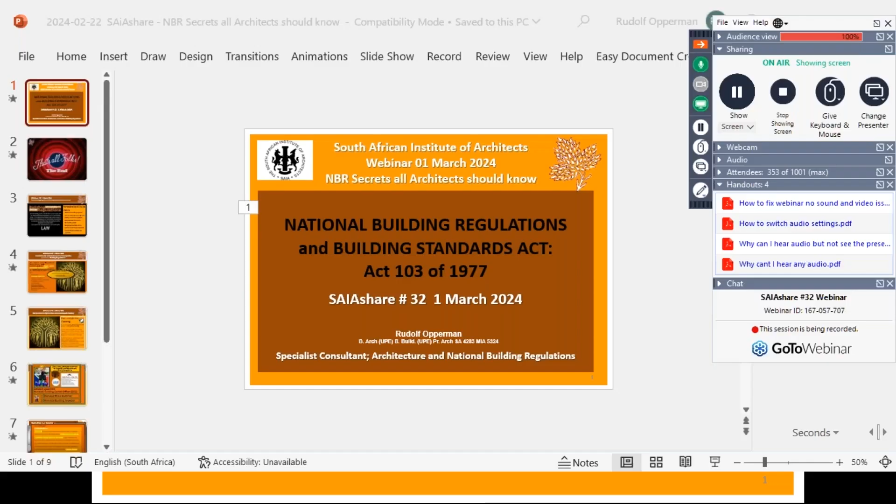Rudolf, over to you. Thank you very much, Eugene, and thank you very much everybody for who's linked into this webinar. I do not take it lightly. I appreciate the fact that I'll be able to discuss some pointers of the National Building Regulations with you.

Ladies and gentlemen, let's get this going. The National Building Regulations, Building Standards Act is a very, very vast, big subject. So I'm not going to try and teach you about the legislation this afternoon. I'm going to just highlight a couple of items. What I hope to do is more keep it short and allow for discussion. You're free and welcome to ask any questions you are faced with, and any information that I can throw you with, so that we can have a discussion and make this thing move.

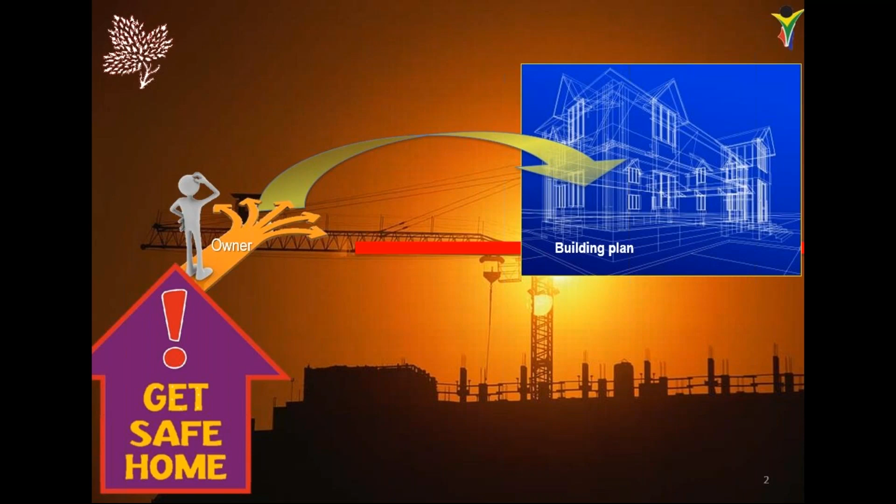We know that there's a whole lot of secrets that are hidden from us in terms of the National Building Regulations, Building Standards Act. But to put it in a nutshell, I think we need to start here with where we have an owner, a client, and this owner and client on the building, and he needs to get a set of blueprints or a technical document that describes what he wants to build, but also at the same time shows him what his dreams are supposed to be. And the only way we can get to the blueprint is by employing building environmental practitioners, and these chaps are taught at tertiary level to put together a set of technical information.

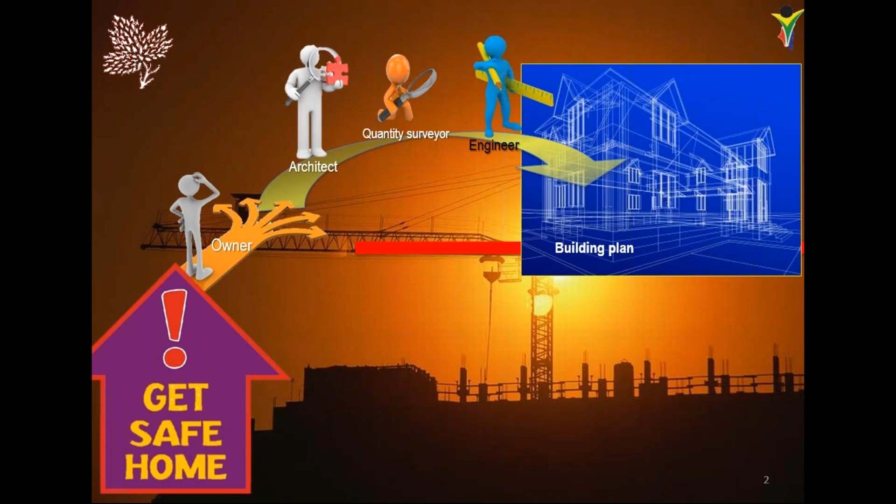This technical information has got a remarkable similarity to what is described in the National Building Regulation as minimum information that must be displayed on a drawing. So if we take that drawing and use the technical information that has been provided for by the professional team, that drawing can be scrutinized to determine as far as yes or no.

Usually the same drawing is also provided to the developer, the main contractor, the bondholder, all of the other side of the building environment, but all other regulators, such in this case the National Home Builders Registration Council. So if we take this building plan and we submit it to the local authority uses the National Building Regulation Building Standards Act, which says all buildings need to be treated uniformly. It has to be in the field of buildings. It must also fall within the jurisdiction of local authorities, and how we prescribe the solutions by using South African national standards provided by the SABS.

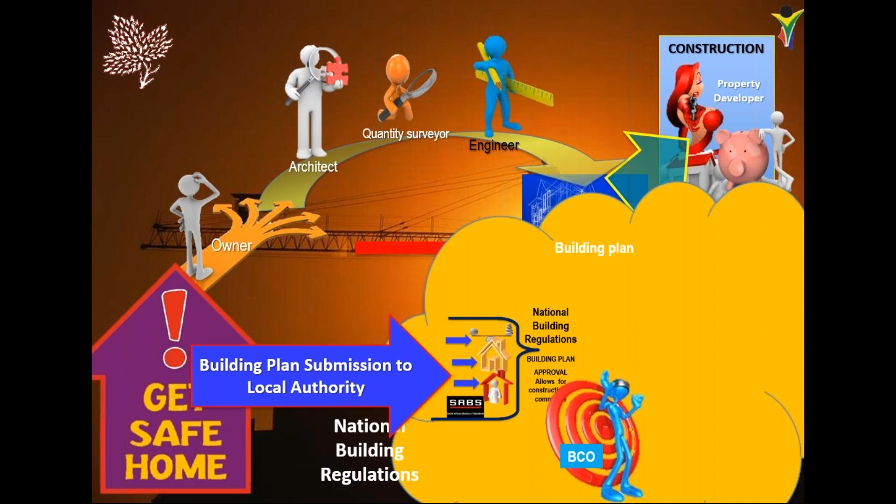Each and every local authority is appointed or is forced to appoint a building control officer. These building control officers come from our profession, and the building control officer then scrutinizes the building plan and then at the end of the day determine if it complies to the legislation or not. If it complies to the legislation, we'll grant an approval. That'll open up the gate for the construction to commence, where all of the specialist trades get involved, and they, at the end of the day, complete the building.

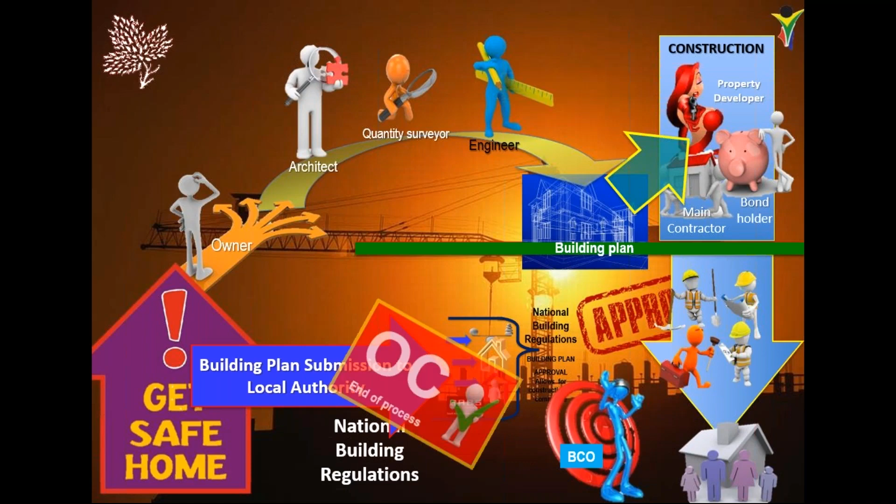Once the building has been completed, the building control officer will issue an occupancy certificate. And that's the end of this legislation. We do not look after maintenance, and we are not involved with the building after it has been completed.

So what is this legislation? This legislation is the National Building Regulation Building Standards Act. It was created in 1977, so it's old order legislation. It's a good vintage, and I can guarantee you that all of the loopholes that were written into it in 1977 have at this stage been effectively closed.

It also requires that all new building work in South Africa must comply with the regulation, as it is the building code. It is a performance-based code, which means it states how a building and its components must perform, as opposed to describing how the building must be designed and constructed. The intention of the 1977 Act was clearly to create an overarching legal and technical framework for the building industry.

We then have the Constitution of 1996. Please take note, it is not linked to the 1977 Act. For instance, items such as municipality - the definition of municipality in the 1977 differs considerably from the definition of municipality in the 1996 Constitution, and therefore arises one of the main problems that we have with the legislation.

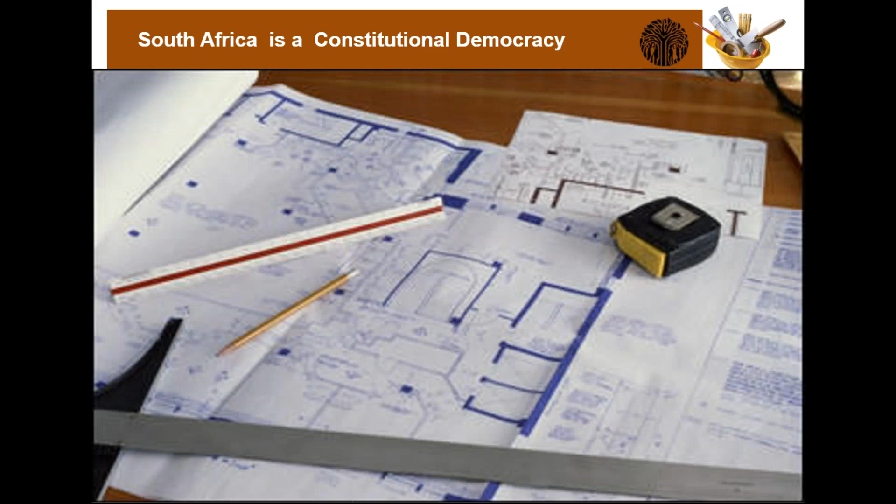So how does our legislative framework sit together? First, we have an act. And unfortunately, this act binds the work that we do. Section 3 of the act provides the duties of draftsmen of plans, specification, documents and diagrams.

Any person who prepares any plan submitted in terms of this act shall affix his name and address, and in the case of the architect, also his profession and registration number to such plan. So we are directly linked into the National Building Regulation Building Standards Act at the highest level.

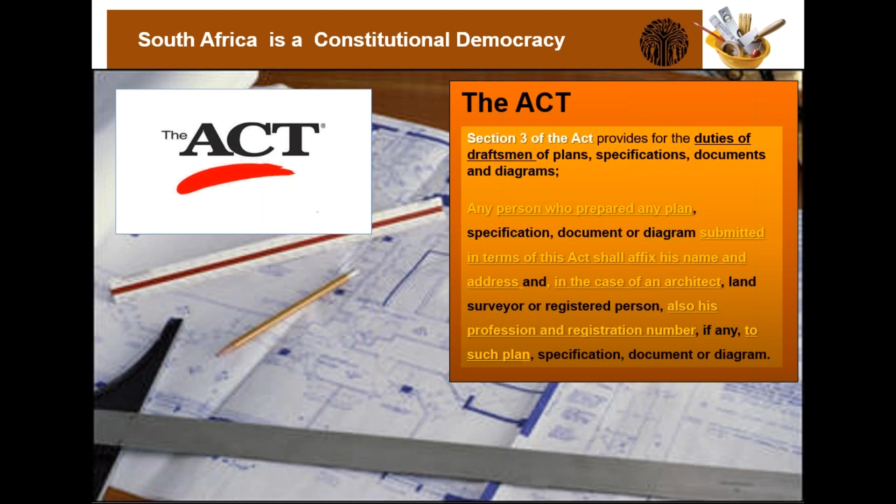Remember, acts of Parliament are created by Parliament, and you cannot change any of the requirements except if Parliament themselves decide to do so. With the Act is a set of regulations. The regulations are the how to satisfy the Act's requirements.

And within that section in the regulations, part A, administration, it says if you design, plan, supervise any building or structure, or the performance of any function in connection therewith, the person undertaking such work is required to be registered in terms of the Architectural Professions Act 2000 or other acts. But that's where we are then physically not only bound by the Act, but we're also bound by the set of regulations. Please take note, this Act was written in 1977, so it's not new legislation, it's old legislation.

Then we've got a set of deemed to satisfy documents. And because we don't want to reinvent the wheel every time we submit building plans, we provide you with a set of easy followable building solutions. These solutions are provided by nominated captains of industry, and they research and debate the requirements and bring solutions that will satisfy the building regulations. And that's what we call the deemed to satisfy the regulation rules.

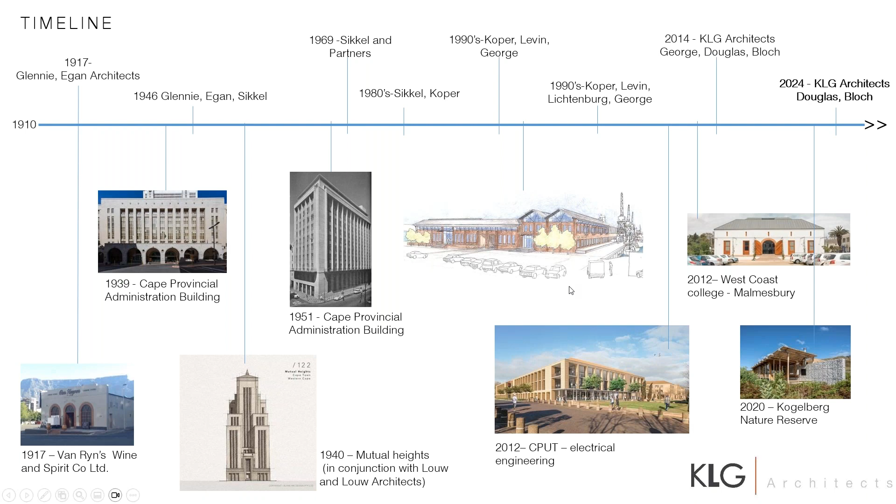This is a summary of what we're about and how we approach architecture in the firm. The first principle is context—this physical, climatic and social context informing the initial positioning. The diagram is very important to us, looking at the bigger picture and synthesizing it into its simplest form that can be expressed in a very simple diagram.

Using appropriate technologies in appropriate ways, going back to first principles, getting the basics right—proportion, flow, layout, spatial dynamics. We refer quite a bit to A Pattern Language by Christopher Alexander.

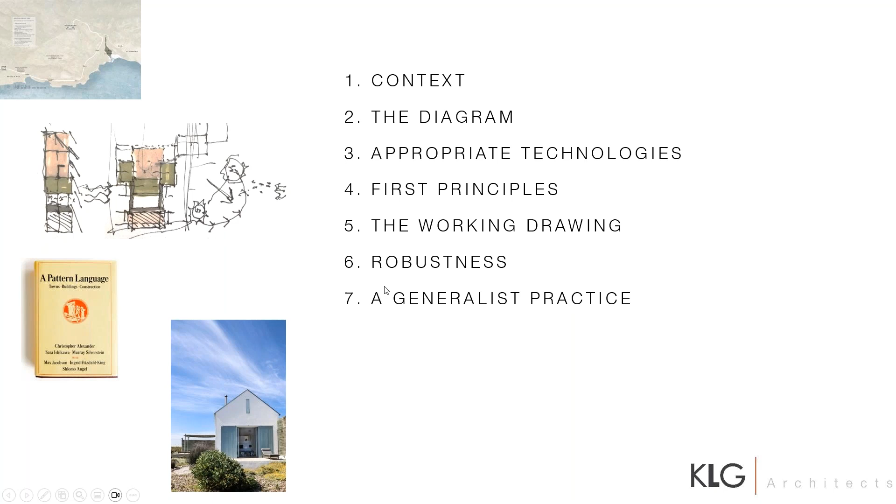The working drawing is also integral to our practice. It's the guardian of the conceptual principles generated, synthesizing this deep into the detailing. We believe in making buildings that are able to take some change, thinking long into the future—what will these buildings be in 40 years' time? And we are a generalist practice, specifically not specializing in any one mode of architecture.

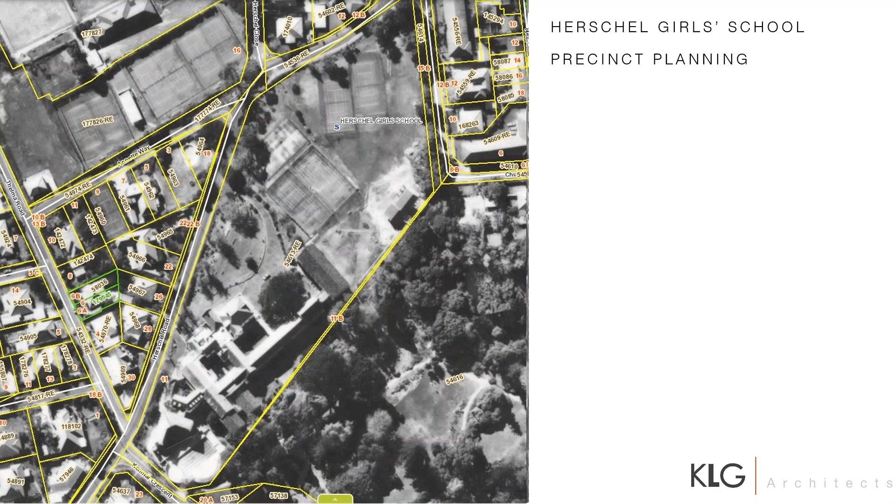I'm going to go through some of the projects that we have been involved with at Herschel Girls School. Herschel is a school in Claremont, in the southern suburbs of Cape Town. We have been involved at the school for 18 years now, since 2006.

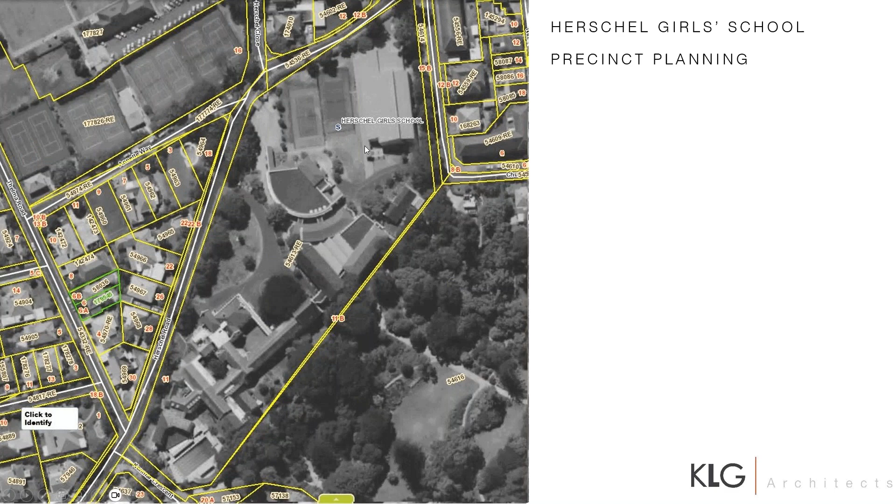The school began over 100 years ago and was built up organically over time, and in many ways with quite disparate buildings with little overall campus planning. One of the benefits of having a long history with the client is that we can work together towards a shared vision of the future, and not in a haphazard or bitty manner.

Integral to all of our projects at Herschel has been generating and updating this overall campus master plan. Our main focus with regards to the precinct planning at Herschel is to identify the opportunities of growth without, wherever possible, taking up valuable open space on the relatively small campus.

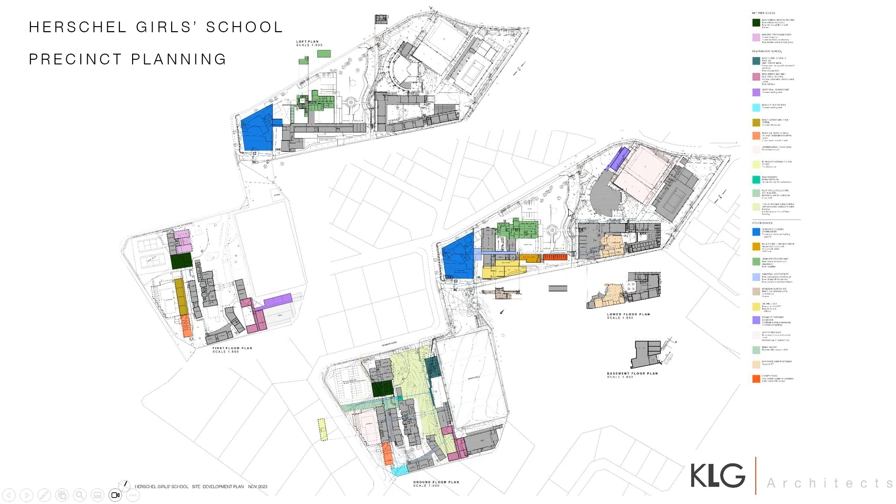So densification of the existing buildings is a primary driver. Legibility and wayfinding on the campus is also integral to our planning, with the ordering of outdoor spaces into a series of interconnected courtyards that provide a hierarchy within the school campus. It attempts to knit together the disparate buildings in a sensitive yet contemporary manner, and give meaning to the spaces between the buildings and its immediate context within the campus.

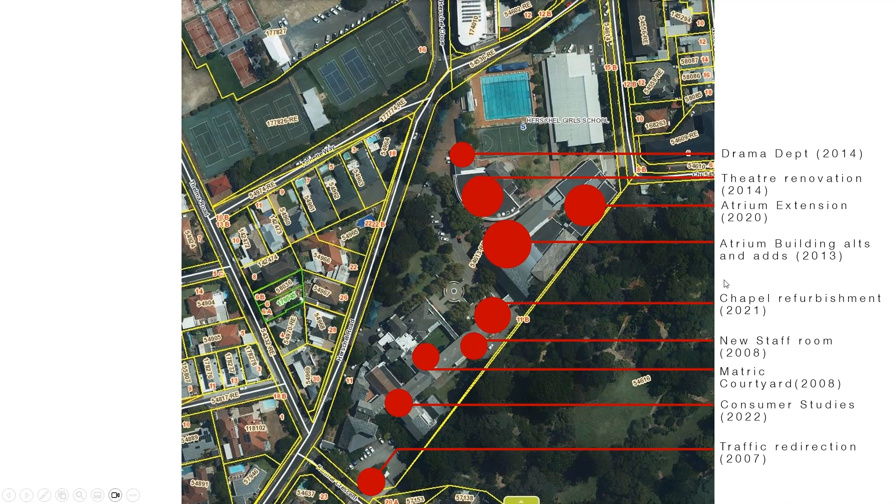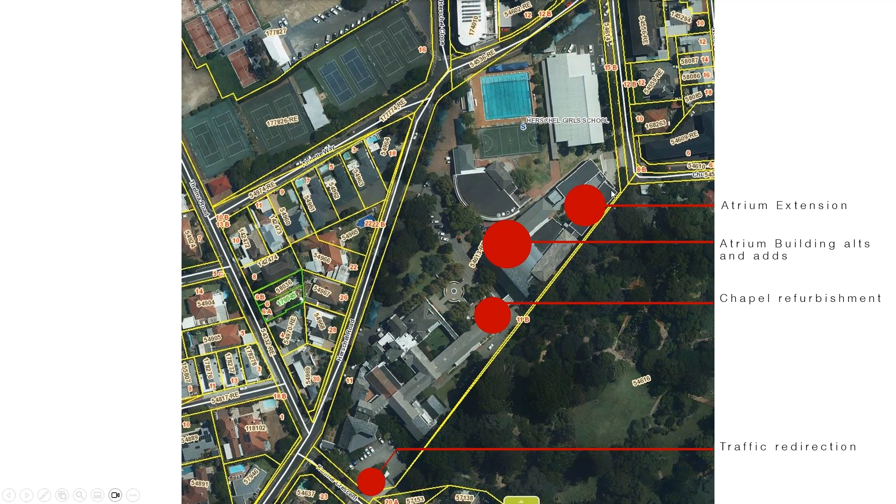Over the years we've been involved with many different projects at the senior school, but today I'm just going to focus on four: the traffic redirection project, the chapel refurbishment, the atrium alterations and additions, and finally the atrium extension project.

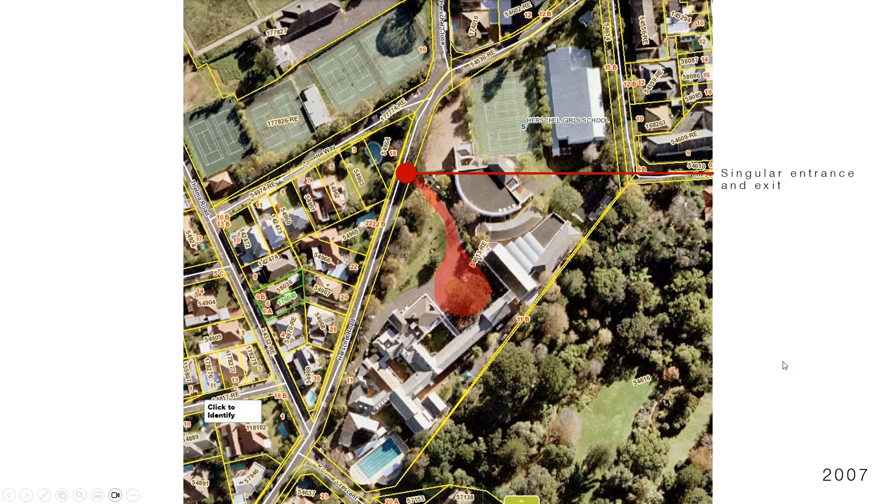This is our first project that we did at the school, in 2006-2007. We were approached by the school due to their horrific traffic problems. There was one entry and exit on Herschel Road with an internal traffic circle in the heart of the school, which caused major traffic problems and backed up traffic on Herschel Road as well as within the school campus.

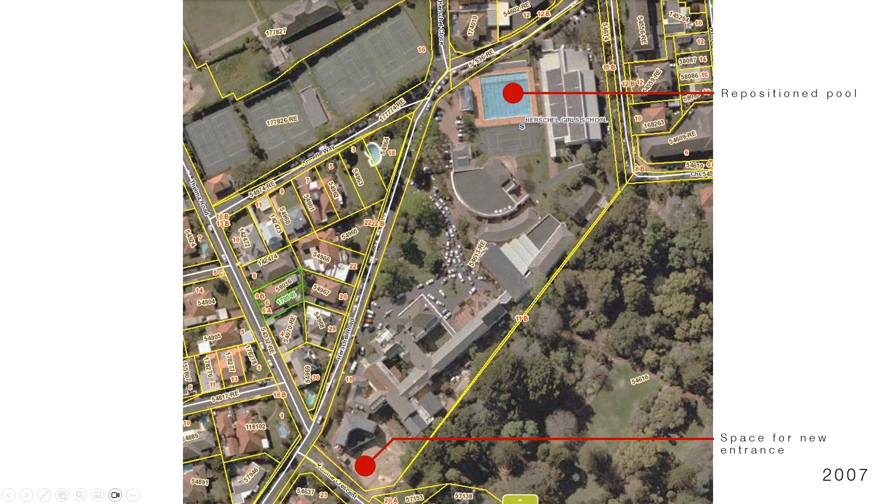So the first thing we did was relocate the swimming pool from the south side up to the north side, which freed up a little bit of space on Kenmar Crescent. This allowed us to put in a new entrance and have the traffic flow at the back of the school, one-way, and out onto Herschel Road.

This created a much longer stacking distance for the parents doing pickup and drop-off, which alleviated a lot of the traffic problems on Herschel Road. It also opened up outdoor space for a formal primary courtyard within the school campus, and gave a front door to the main reception and admin building—the oldest building on the campus.

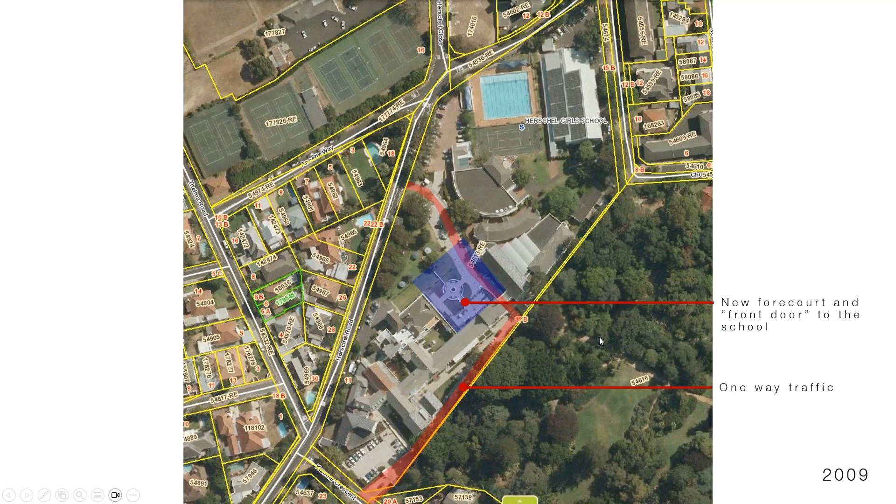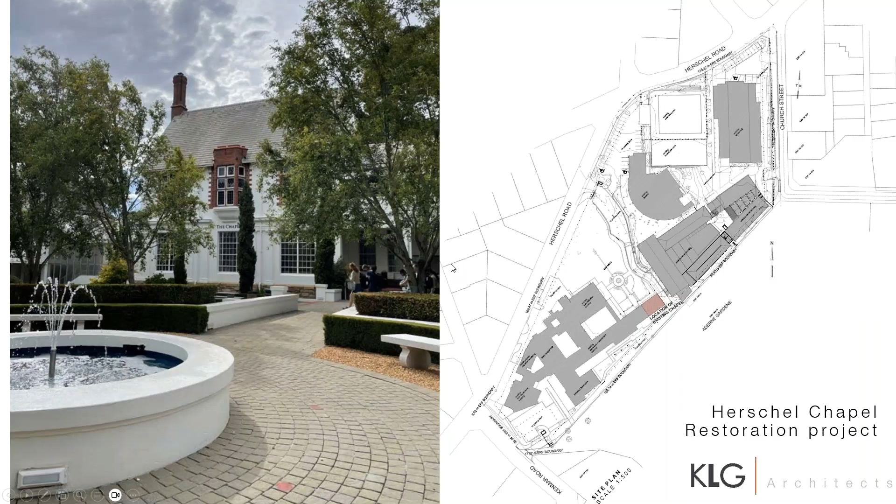The chapel was built in 1939 by Walgate and Elsworth. It's quite an important building for the school on the campus, built in the English Tudor Revival style with some Arts and Crafts influences. It was originally a library for the school, converted to a chapel in the 90s. It has some quite beautiful architectural features inside, and importantly, some very complex, complicated brick detailing around the windows.

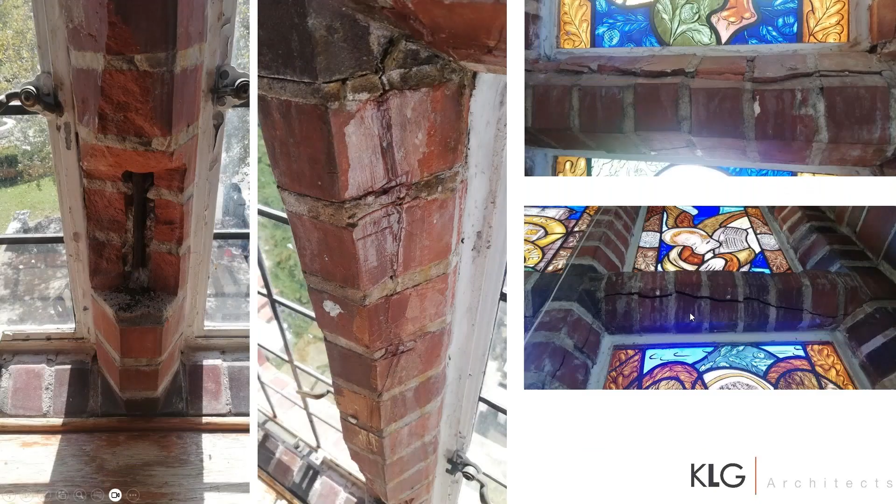The reason we were approached by the school was due to a catastrophic failure in the bricks at the windows.

Inside of the bricks is steel reinforcing rods, and with close to 80 years of water and moisture ingress, these rods rusted very badly, expanding and eventually cracking all the bricks quite badly.

The first step for us was to identify all the different brick types. There are 17 different types, all with different shapes, sizes, and cutouts depending on where it is in the window. So the head and the sill and the interconnecting bricks are all slightly different.

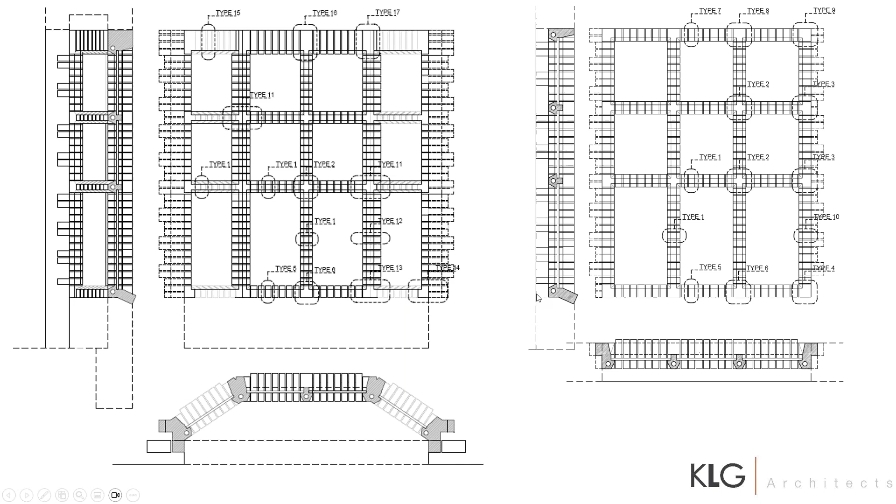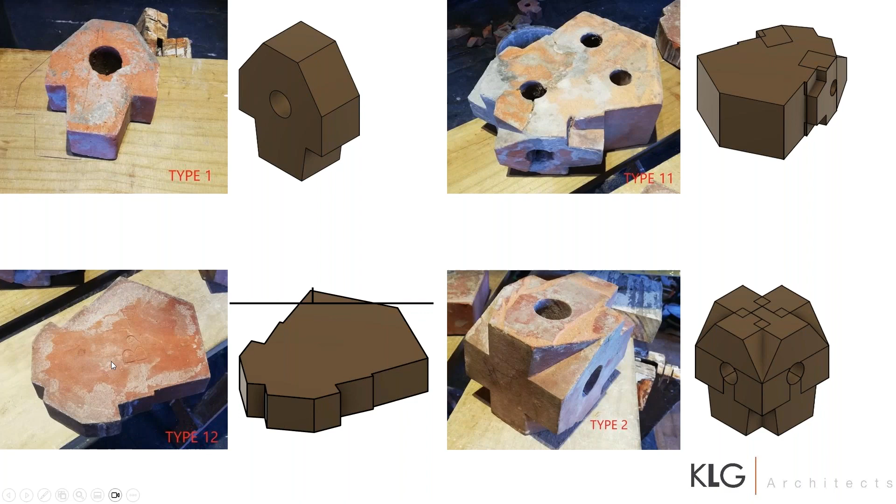These bricks were originally imported from the UK, but we were dead set on finding a local manufacturer. Corobrik luckily agreed to make the bricks for us. So we disassembled one of the windows, carefully saving the different brick types, packaged them up carefully, and shipped them off to Midrand to the Corobrik Specials factory.

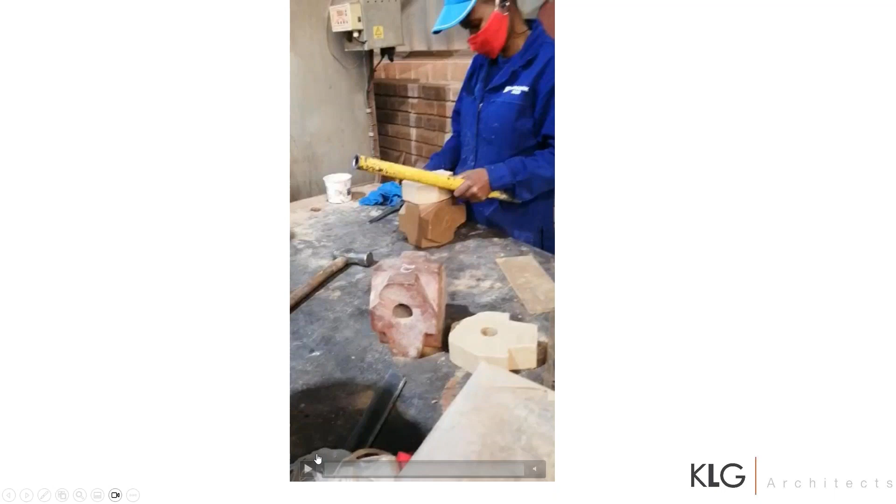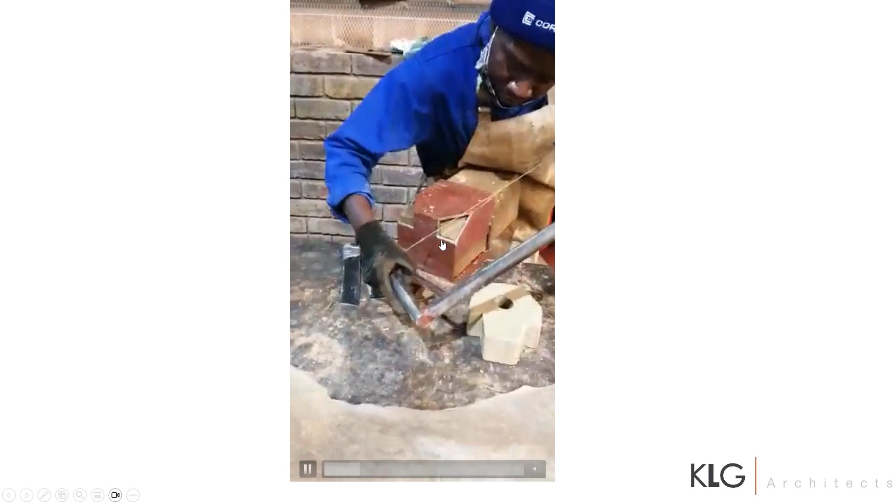Here's a short clip of the manufacturing of the bricks at the Corobrik factory. They were all made by hand, cut out very carefully using the steel templates. All of the holes in the bricks were cut manually using the steel wire cutters, and all of the different shapes were cut out using the templates.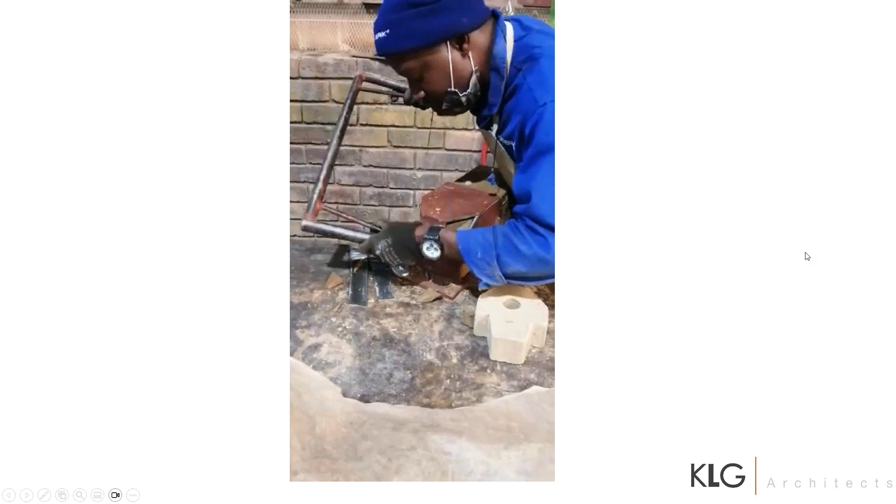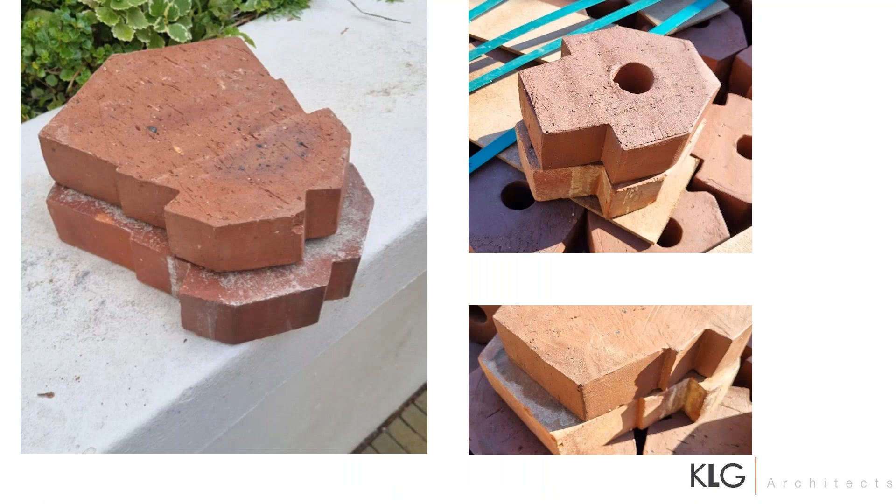Unfortunately, there were some hiccups on the way, where the contraction of the bricks was underestimated during the firing process in the kilns. This is due to just the size of the blocks of clay that were used, and a number of the batches of these bricks that were delivered to the school were unfortunately condemned, because they simply were not usable, because they had to tie into the existing bricks and the shapes and sizes needed to be very precise.

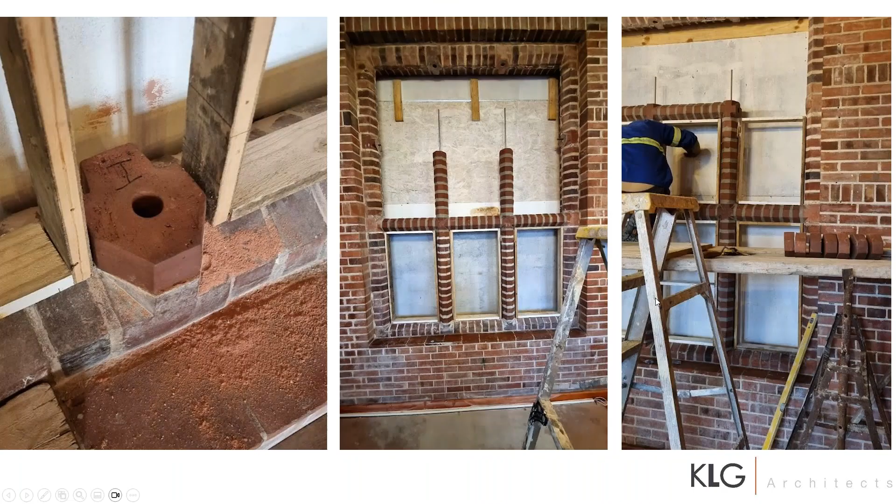Corobrik luckily did stick with us and stuck with the project, and eventually we were able to start the reconstruction process.

We worked with a very good contractor on this project, and it's to be very carefully done. So we made up timber frames for each window bay and carefully marked the coursing of the bricks, and built it up using 316 stainless steel rods.

We also looked at the mortar between the bricks very carefully to prevent moisture ingress, as well as to match the existing color tones within the existing building.

The next project was from 2013, called for additional classrooms, a new full-grade venue, new tuck shop, eating area, and social learning space. It was to be positioned in the heart of the school at the existing atrium block.

The existing atrium building was originally designed by Louis Karol in the early 90s. It had a curved building that related quite strongly to the theatre building that was also done by Louis Karol.

Our intention was to densify on the existing footprint, opening up valuable outdoor space on the campus and connecting this open space back towards the building. The other intention was to create a much stronger link between the new forecourt linking back to the north side of the school, which was quite cut off with the existing atrium building.

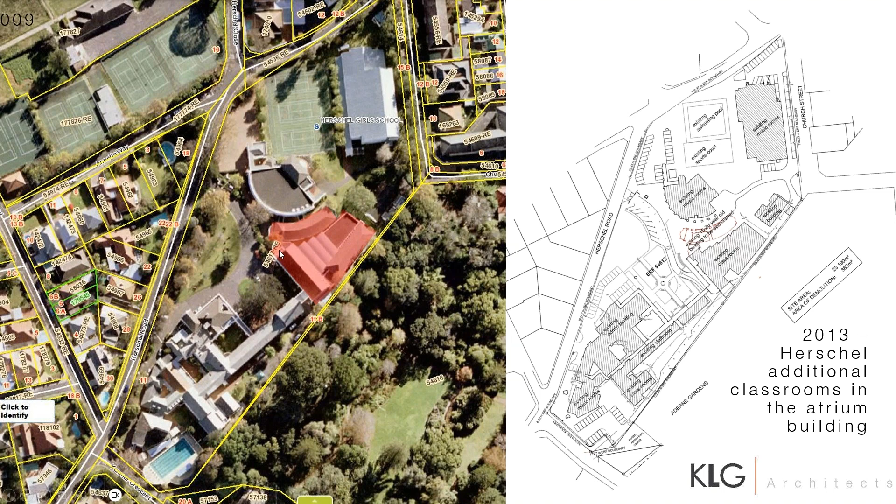This is an aerial photo of it during construction. So we demolished that curved classroom block, which opened up this triangular space between the theatre and the atrium building, and straightened out the building with this straight building running southwest to northeast, carefully integrating it into the existing roof lights and the existing atrium space.

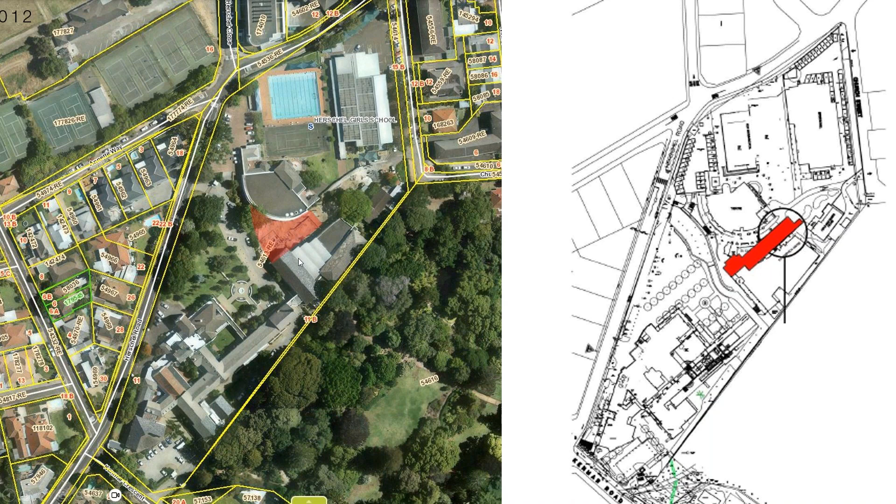This creates a much stronger link from the former forecourt down towards the bottom of the school. On the ground floor, we have the new full-grade venue, the tuck shop, eating area, and the social learning space on the corner, which opens up into the heart of the school with a lot of visibility into the outdoor spaces on the campus.

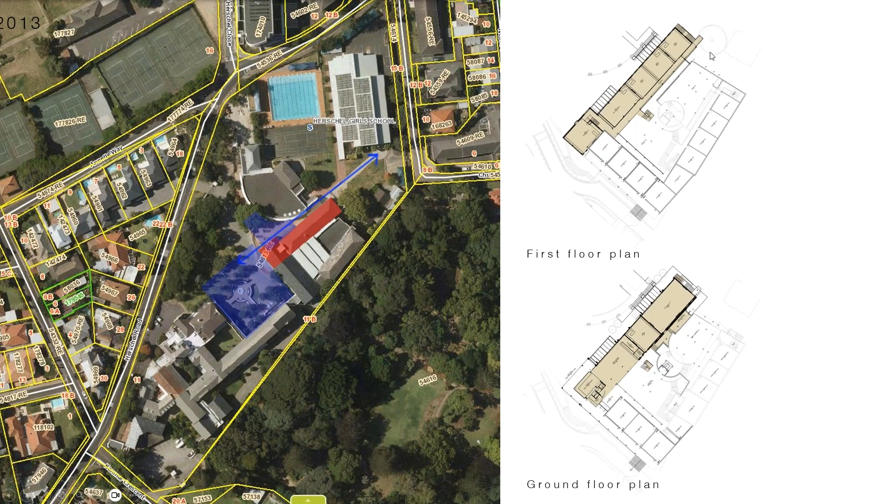We use quite simple materials, expressed in a contemporary manner, expressing the natural properties of the timber, screens and pergolas.

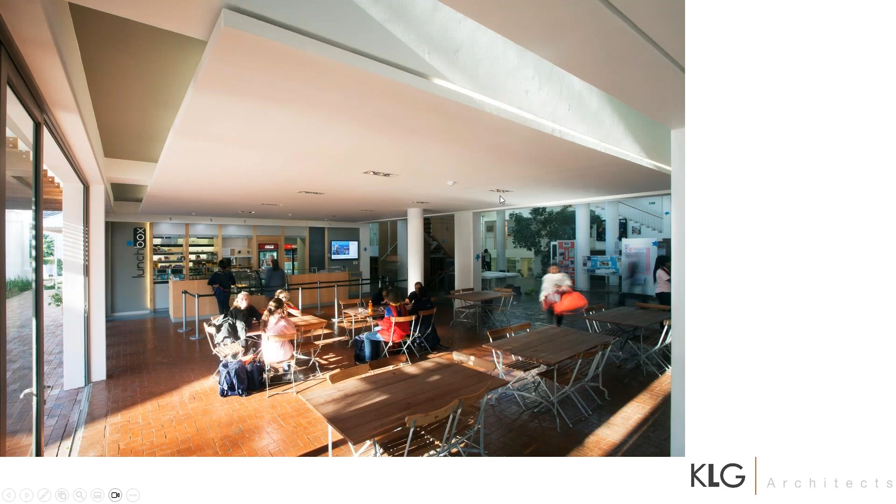This is a photo from the existing atrium, looking through the eating area and tuck shop and out into the outdoor space. Another view of the tuck shop, and then another view of the Louis Karol atrium in the eating area, showing a strong connection to that outdoor space.

Onto the atrium extension project. The brief was to house a new music department for Herschel, and the primary idea was to complete the existing atrium building with a ring of buildings around the perimeter, with a light-filled atrium space and outdoor spaces within that ring. By drawing on the existing rhythms, scale, and proportions, we were able to give the new building a contemporary identity.

The north edge of the building reinforces the existing thoroughfare down to a new major entrance on Church Street, which now links that entrance up to the rest of the school.

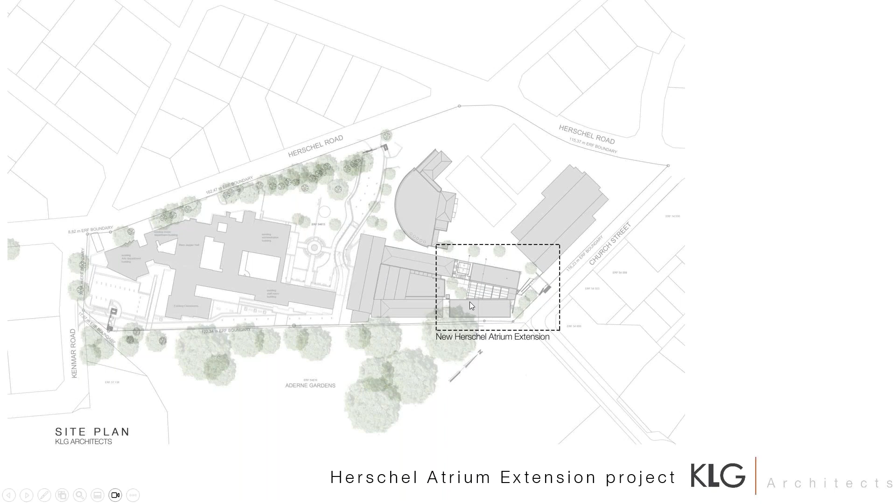A courtyard space separates the old atrium building from the new atrium building, serving as an outdoor chill-out space as well as a separation for acoustic purposes.

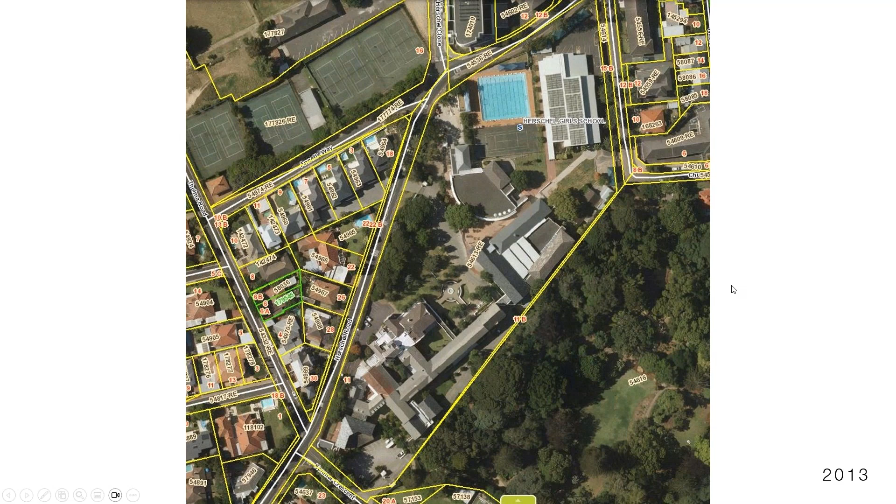This is just a quick fly-through of the construction process: before construction started, during construction, and then finally the completed project.

This is the basement level plan. The brief for the building was conceived during the day zero crisis, so the basement holds 250,000 liters of water in storage tanks across three compartments for irrigation, toilet flushing water, and potable water, each with a different level of water treatment. It also houses a large school store and a maintenance workshop.

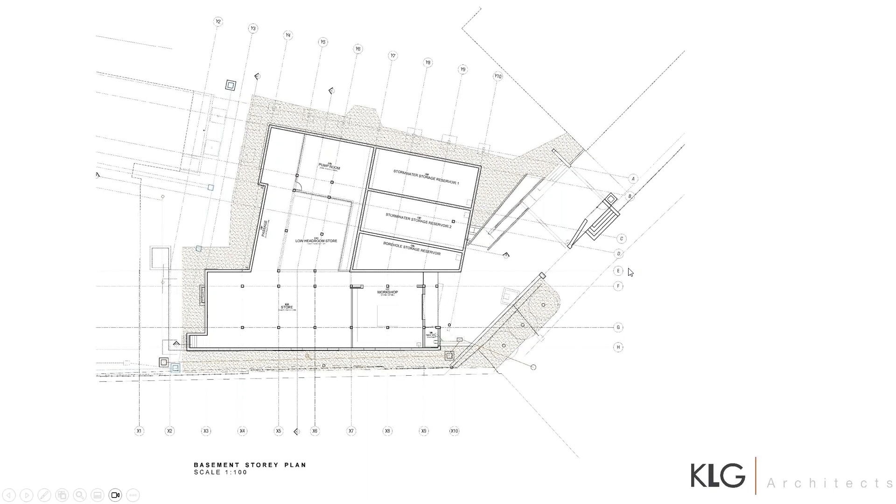This is the ground floor plan. The building is arranged around a central inward-looking, light-filled atrium space which connects all of the venues together. The atrium space doubles as an impromptu performance space for music events. The ground floor venues are all the larger shared music venues, like the ensemble rooms, the drum room, the large auditorium, the choir practice room, and then the atrium space and the outdoor courtyard.

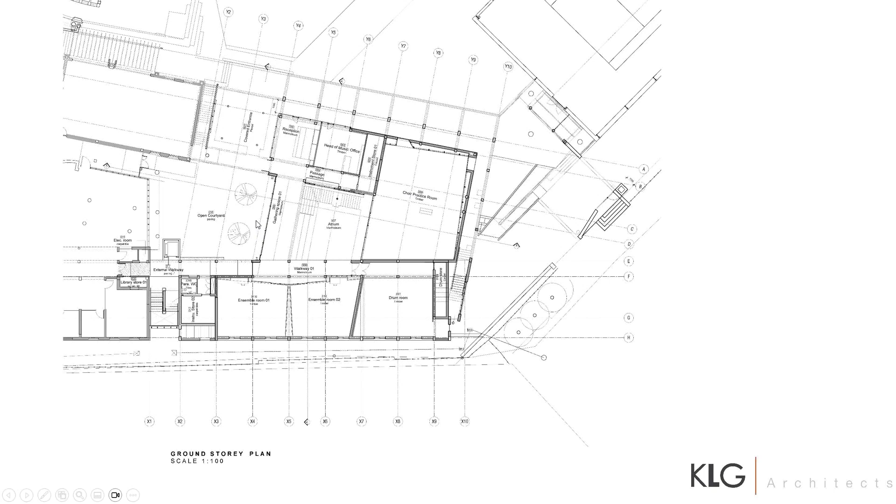The internal architectural detailing was predominantly determined by the rigorous acoustic focus. All of the music venues have a very high acoustic rating, allowing multiple music venues to operate simultaneously within very close proximity. The first floor houses the practice teaching rooms, singular practice rooms, a music tech room, and some larger

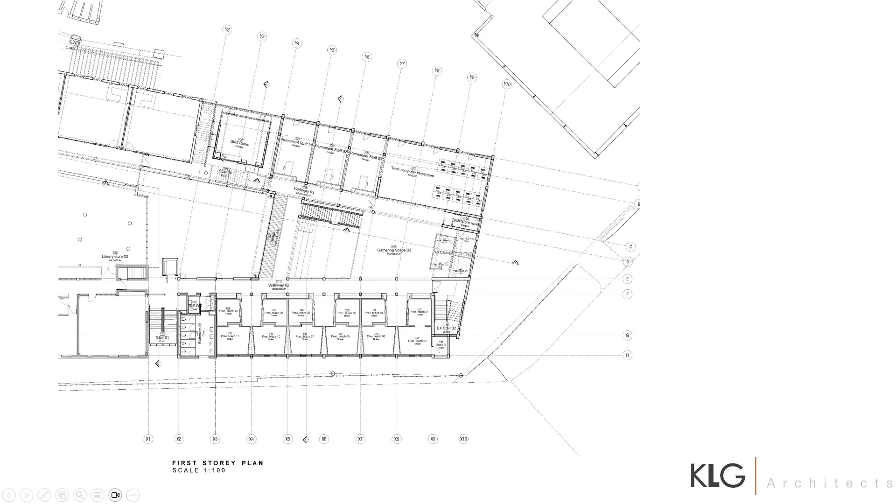practice and teaching rooms for the staff, as well as a large gathering space, a social learning space in the atrium, and the staff room.

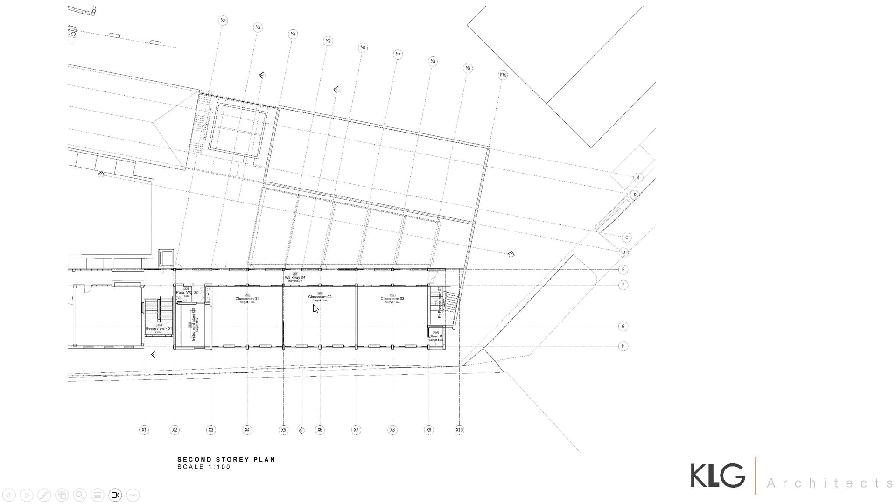On the second floor, there are views up into the yellowwood trees of the Aderne Gardens, which lie to the south. There are uninterrupted views of Devil's Peak and Table Mountain to the north. These spaces are also acoustically treated for teaching purposes.

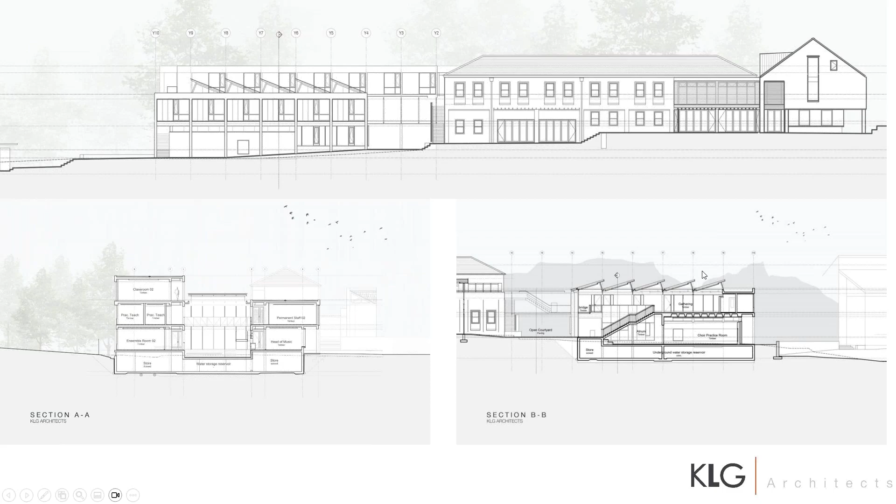As I mentioned, acoustics were a major focus of the building. We worked with Sound Research Lab, who were absolutely fantastic on this project. There were two main elements: sound insulation, so two venues can operate next to each other simultaneously, and sound absorption, which is the quality of the sound in the space.

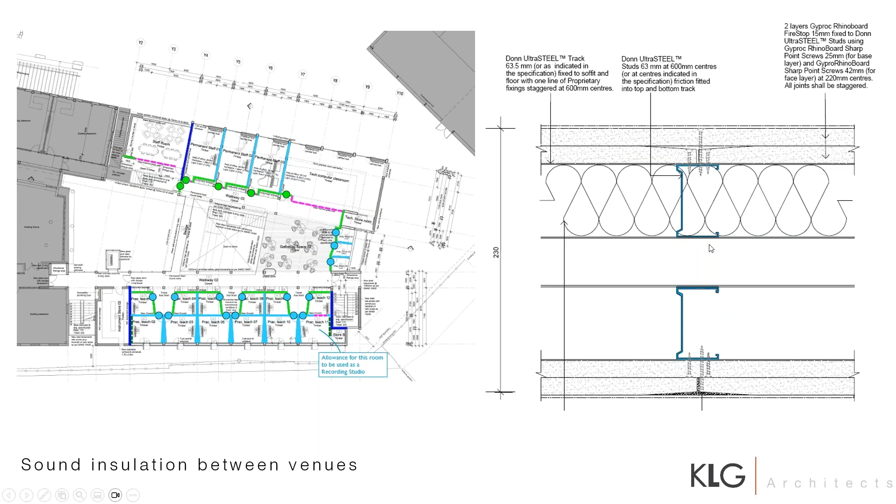Each venue was assigned a different sound insulation rating, which generated this plan, allowing us to determine the level of detailing required in each venue to stop sound from leaving it. We generally used drywall construction to avoid excessive loads on the structure. This is a typical drywall construction detail plan with a double layer of 15mm Firestop boards on a separate double stud system, with an air gap between and high density insulation.

In section, we have a thick 270mm concrete floor slab to stop the lower frequencies from getting through. Suspended underneath this, on resilient ceiling hangers, is a 15mm skimmed plasterboard ceiling with insulation above it, and suspended below that is our Class A grid ceiling. The floor is also mounted on resilient rubber blocks to avoid sound penetrating into the concrete slab.

None of these elements were allowed to touch. The walls, floors, and ceilings were all separated by 10mm, either via a resilient perimeter strip or high-density polyurethane.

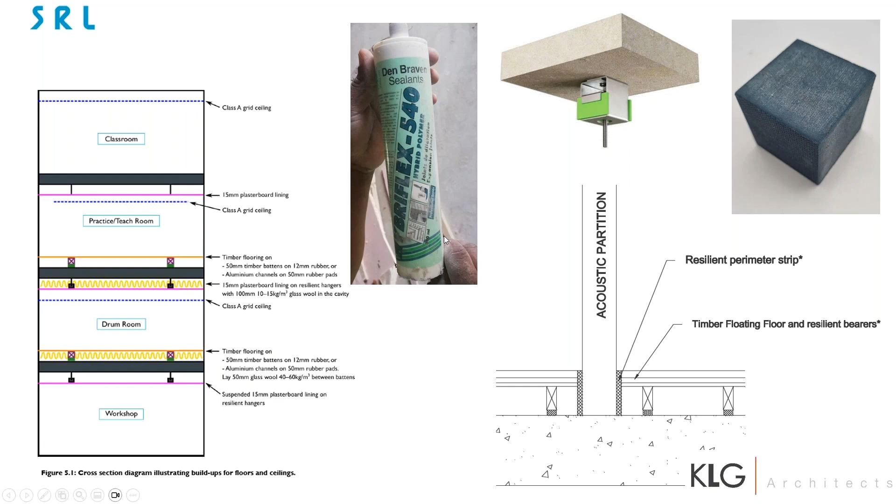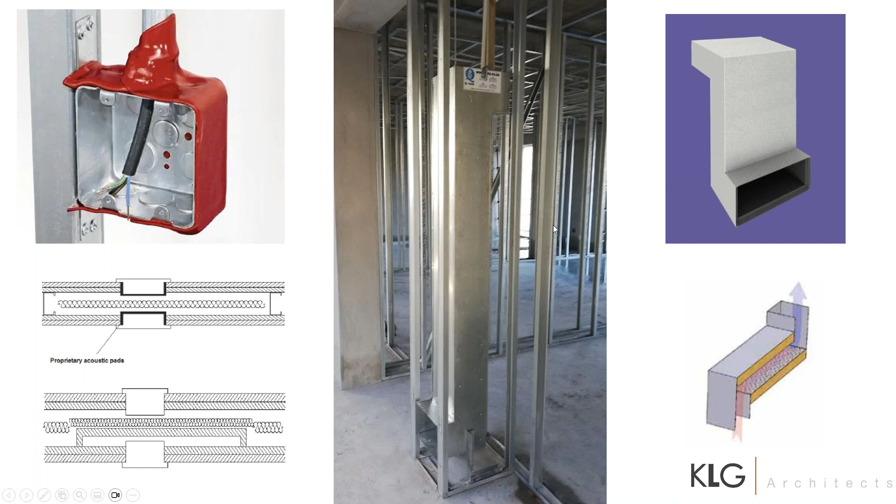The penetrations in the walls and ceilings of the building were very carefully controlled. Electrical outlets were wrapped in putty pads. The mechanical fresh air system had offset intake and outtake vents with baffles between them, so sound had to travel through all the baffles in order to escape or enter the room. Any electrical conduits were also filled with tiny sandbags at the end to prevent sound from escaping.

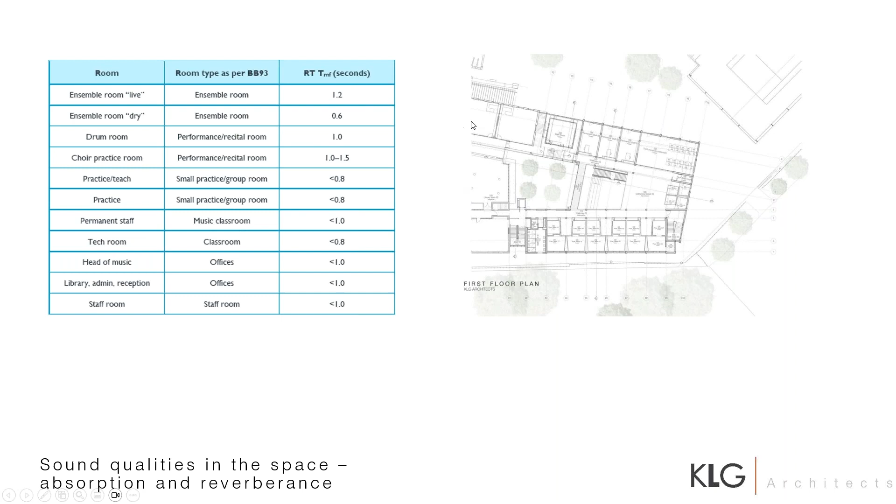The acoustic absorption in the music venues was also carefully considered. Each venue was assigned a different reverberation delay time value. For instance, the ensemble live venue had 1.2 seconds and the dry ensemble room had 0.6 seconds, and this obviously affects how the sound works in the room and how it's taught.

In order to meet these requirements, we introduced various things, including the acoustic ceiling, which is the Class A grid ceiling. We had acoustic wall paneling where necessary, and we used pinning boards in the venues to absorb some of that sound, as well as curtains. We have acoustically treated curtains which you can open and close to increase or decrease the reverberation in those venues. The other main way we reduced reverberation within the venues was to utilize the existing geometries of the building itself, creating skew walls in the venues so that there's less sound bouncing between two parallel walls.

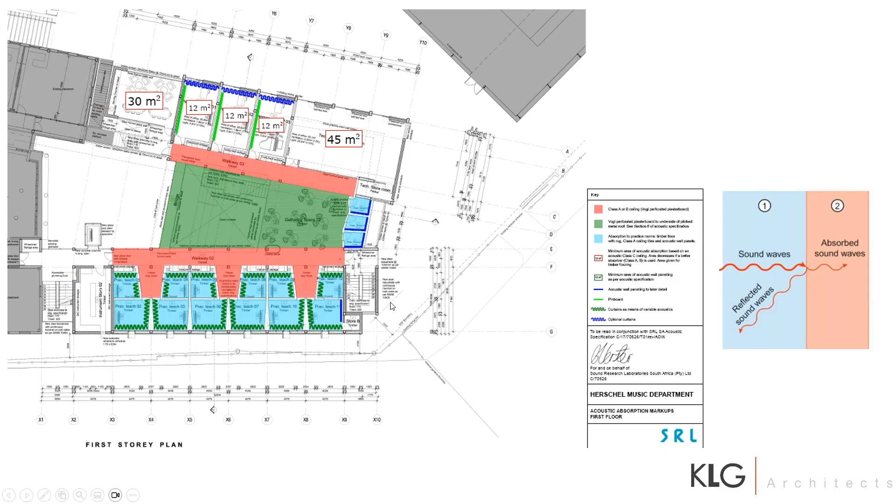In the auditorium space, we have two thickened walls with sound insulation slats, with insulation behind the slats. In these thickened walls was also the fresh air system that was mounted.

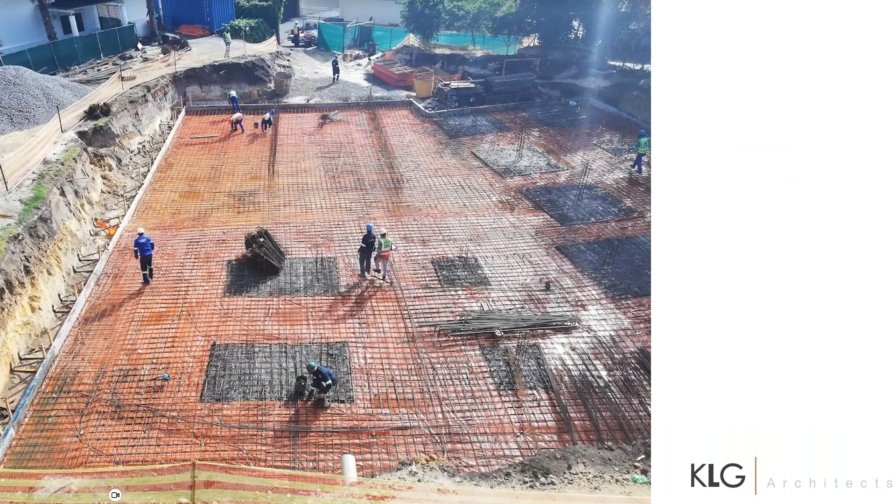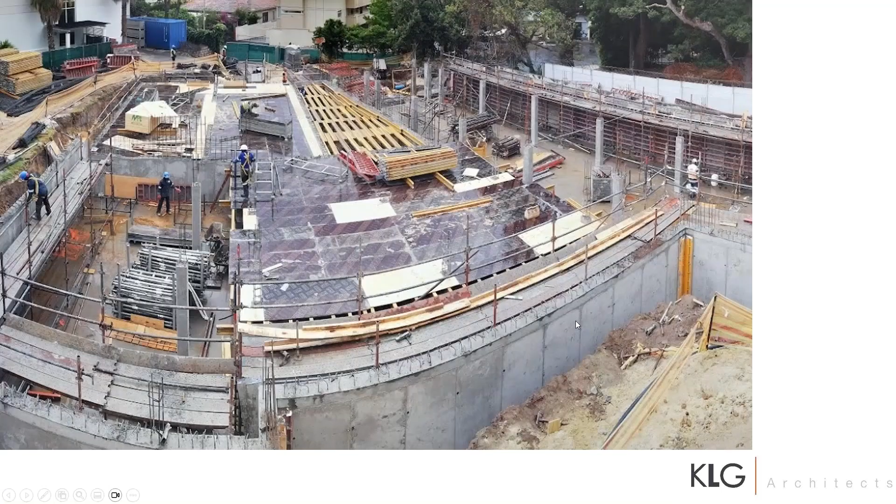Just very quickly going through some photos during construction. This is the basement drainage and reinforcing layer. Tiling of the basement, you can see the three water storage tanks being set out. Topping out of the basement, going to ground floor reinforcing, the building coming out of the ground, eventually getting a sense of the scale and proportions of the building.

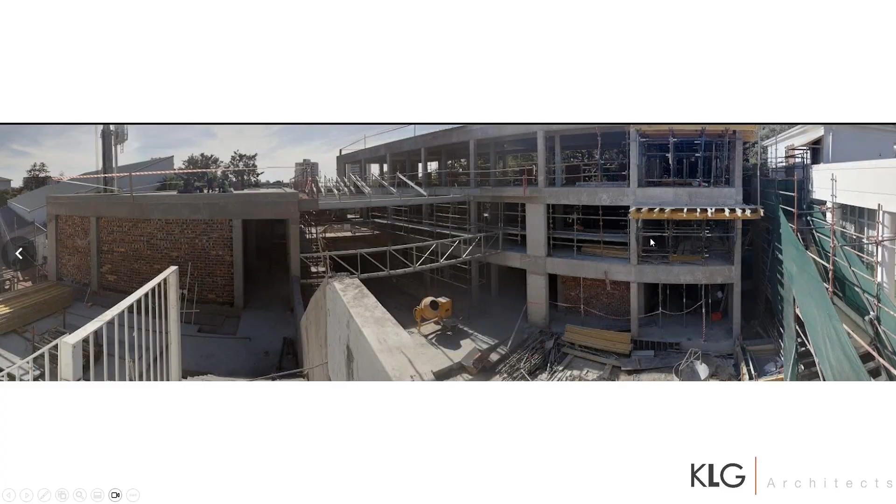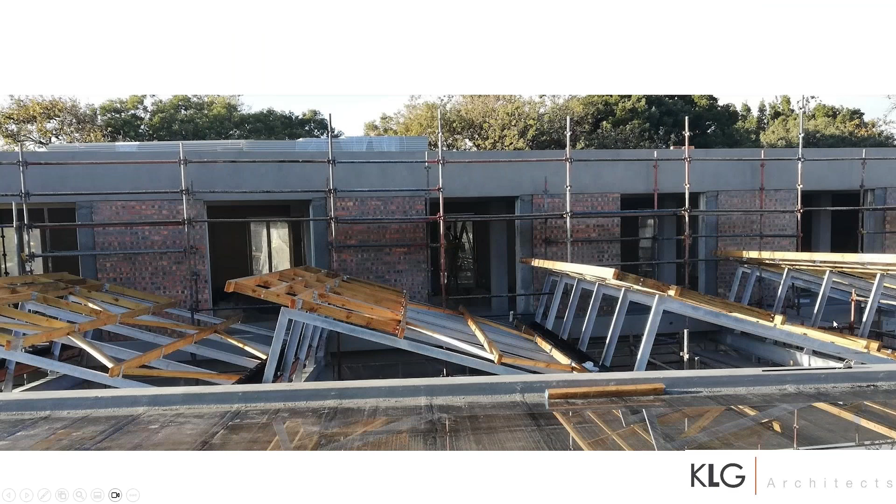This is a photo from the outdoor courtyard looking back towards the atrium side. This is just a photo of the sawtooth roof during construction, and the perforated ceiling boards to allow sound to be absorbed into the insulation overhead, and a lot of light and views of the sky in that main atrium space.

And finally, this is just some of the photos of the completed building. You can see the additional building there.

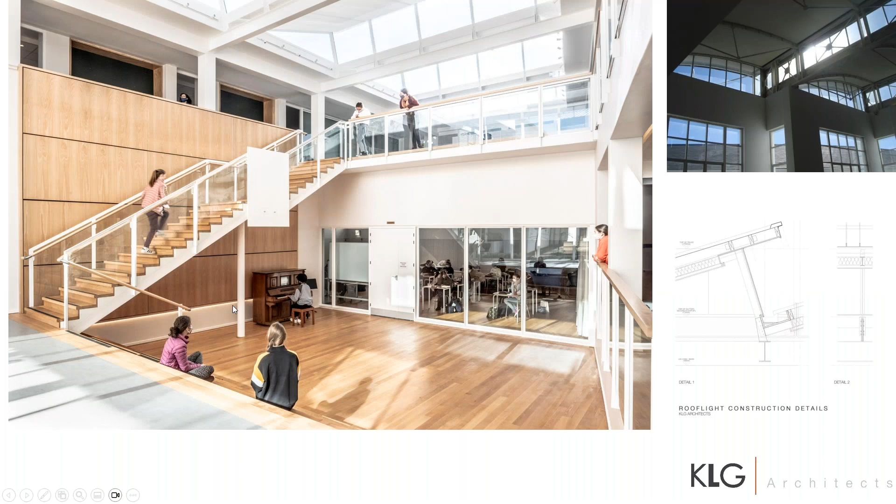The atrium space is filled with light. We wanted to have a lot of visibility into all of the venues, so a lot of the venues have large panels of glass. Even the practice teaching rooms have glass in their doors, so that there's visibility into each music venue.

We were invited to the opening of the building where they held a concert in this main atrium space, and it was quite magical. All of the staff, parents and the learners were on the first floor, all seated onto these seating steps, and the acoustics in the space were quite fantastic. Thank you very much.